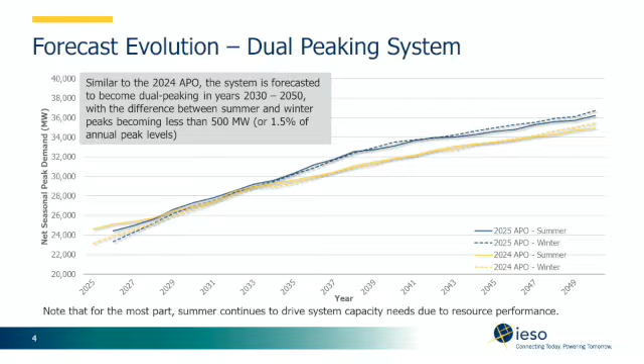In terms of the capacity adequacy outlook, this is assuming all resources are around till the end of their contract with us. If they're rate regulated, they tend to continue indefinitely, these hydro assets with OPG. It does assume some stuff that hasn't been built that was procured in the LT1 procurement, as well as we had early insider knowledge on the Pickering refurbishment and Darlington SMRs, right? So those are baked into our base case.

So this is where capacity expansion comes in, and I want to be clear, the results of this should not be construed as an integrated resource plan for Ontario. We are very aware of the limitations of this modeling process, especially using one deterministic scenario. If this forecast comes to be, if all those costs are actually right, if we can actually buy the stuff and build it, this is what it looks like.

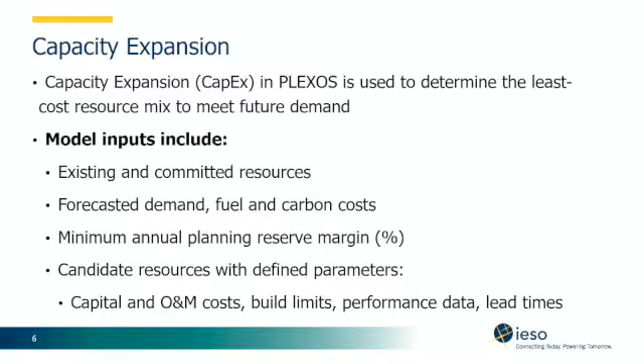Fuel, like the natural gas cost, and we assume the carbon cost goes up and stays in place for the forecast. We didn't include CER in this. We did do a with and without CER analysis last year, but our forecasts tend to only include certain policies and not try to anticipate policies, because that's a bit of a fool's errand we've found. So this one doesn't include CER. Honestly, the results between the two are fairly close in the long run. The only difference is a slight increase in emissions in the near term.

We use a minimum annual planning reserve margin to guide it towards adequacy. And then a bunch of candidate resources, capital and O&M costs, build limits, lead times, performance data, largely sourced from NREL, as I think most in the industry use. And then we have a bit of our own inside information on some nuclear costs and lead times, right? So we're not allowing new incremental nuclear beyond the SMRs and the Pickering refurbishment until the early 2040s, through discussions with Bruce, OPG and our contract management team. It looks like it's probably going to take 16 to 18 years if everything goes right.

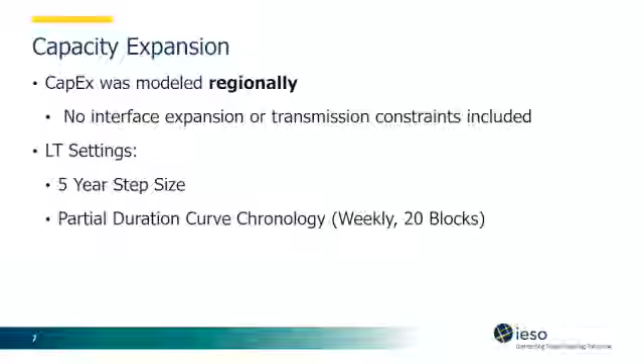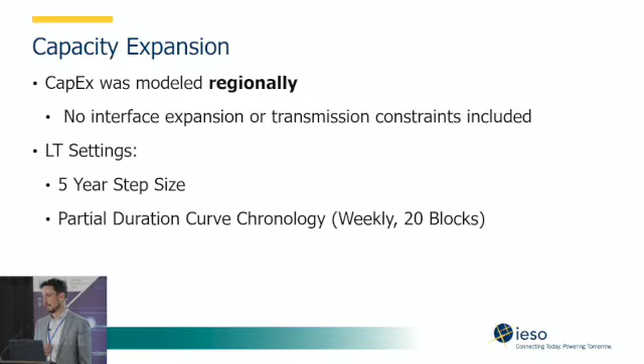We've done some analysis since then. Fitted duration seems to work slightly better, but runs a little slower. Surprisingly, using the sampled chronology, probably just due to the limited scope of our server, it's not sampling enough to improve the results, so we're sticking with duration curves.

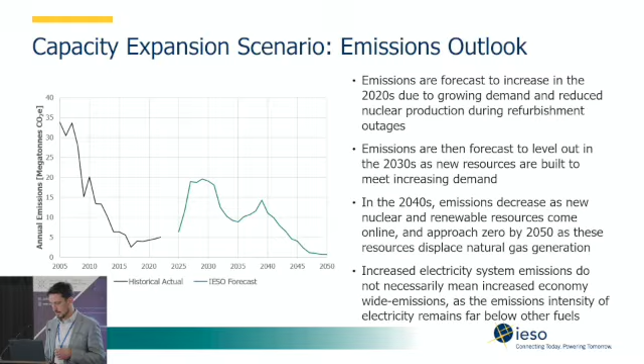So what are we looking to do? This is the funny thing about this whole process for us: we finished this analysis like November of last year, right? And are just wrapping up our 2026 analysis. So when I developed these slides, it was, what are we going to do for 2026? Well, now I can tell you what we've done. I just can't show you the results.

So we have co-optimized the build-out of generation and transmission now. So we can say, this interface needs to be expanded by this much, and this is roughly where these resources should go. Still need to vet it with our transmission planning counterparts to see if it's in any way reasonable, but hopefully we will pass that test and be able to publish kind of zonally where we think resources should be situated.

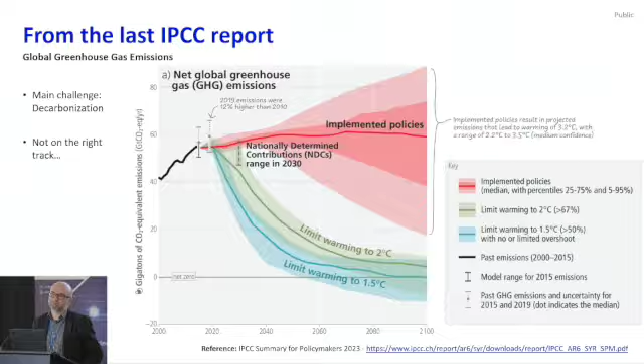So in terms of Hydro-Québec, we connect this decarbonization challenge mainly with electrification. That's why recently Hydro-Québec released a kind of action plan for 2035 and then 2050. It's based mainly on 5 different priorities. I will mainly focus on priority number 2, but maybe I can emphasize a little bit priority number 3, which is increasing the capacity, the production of electricity.

There is an objective of doubling the electricity production by 2050. And I think it will be like 60 terawatt hours more by 2035, which is quite big. So there will be a lot of investment in the coming years to increase the capacity in Quebec.

But what I will focus on today is really priority number 2. So how to better consume the electricity by the different customers and the end users. So we set up 2 targets. First one, the 21 terawatt hours in terms of energy efficiency to implement in the different sectors of our economy: industrial, commercial, and residential sector. And also a second target, which is more about managing the peak demand, so trying to decrease by different means by 3.5 gigawatts the power peak demand during, well, it's a winter peaking region, so during the winter, of course.

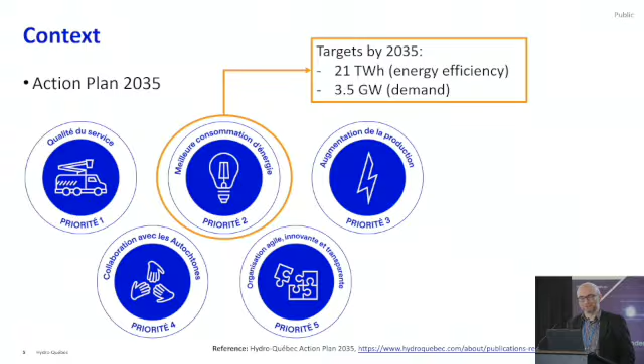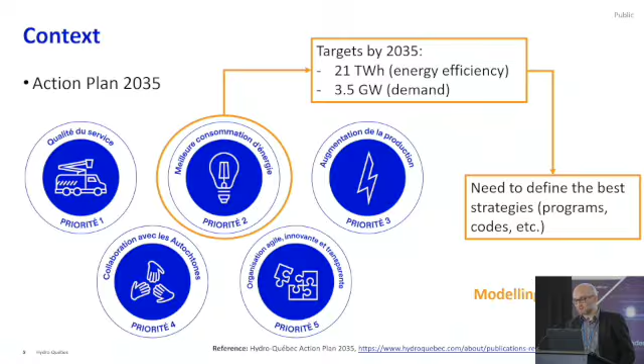So doing so, it requires to define strategies, so that we can set up the best programs, the best standards, the best building codes, national energy code for buildings also, etc. So to do that, we set up big modeling tools, and that's what I'm going to speak about today. So the topic is building stock modeling. What is it? If we make it very simple, it's like a digital twin of our residential building stock. So we try to have a virtual representation of our buildings. And it is based on different components.

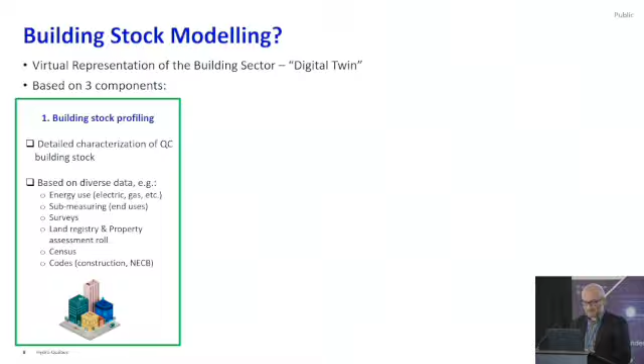The first one, we need to characterize our building stock, so to have a clear idea of what is in our building stock, and it's based on the large diversity of data coming from the energy use, from sub-metering measurements, from surveys, from land registry, property assessment roll, a lot of different data that we need to gather together so that we have a better idea of what our building stock is. If we don't have it, we use the codes, so the construction code, building code, or the NECB, the National Energy Code of Canada for Buildings.

So based on that, a second dimension is, well, we try to model it. There are two types of big approach, I would say. Top-down approach, where we try to have a global view of the building sector and we model that sector in that way. That's not the approach that we use. We try to deep dive in the residential sector and aggregate everything at a higher level. So for that, we have two main approaches I will discuss today: an archetype approach and then a more generative approach. And then you have a list of tools that are commonly used in the building industry. EnergyPlus, OpenStudio, those are clearly the tools that we use commonly.

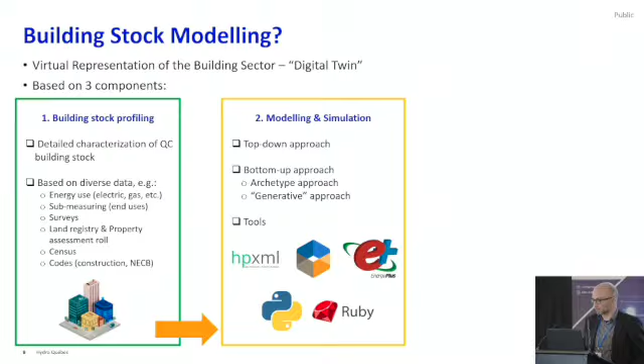And of course, we do all that for end applications. So the idea is really identifying, assessing different energy flexibility and energy efficiency measures so that we can identify the best strategies to fulfill or to reach our goals in terms of energy efficiency and reducing the peak during winter periods.

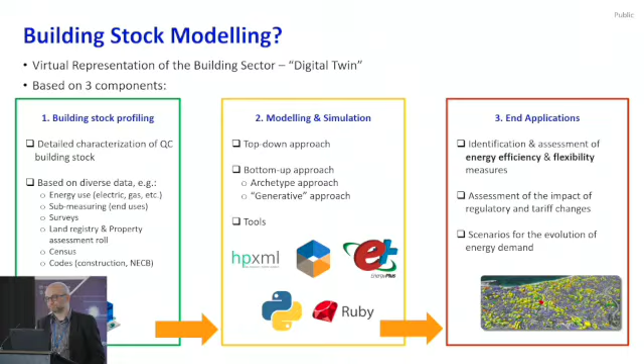So the first initiative, Archetype Quebec, is a collaboration with multiple partners, with the Quebec Ministry of the Environment and also two universities that actually do the deep work on that, Concordia University and Polytechnique Montreal. So the idea of that initiative is really to develop calibrated and validated models for all sectors actually, but we mainly focus for now on the residential sector. The main inspiration is the US prototype buildings. So we try to have our own models so that we can use them, and it's more precise to have our own models. And the future research that can be done is mainly built on that, trying to have a better representation of our building stock using these archetypes.

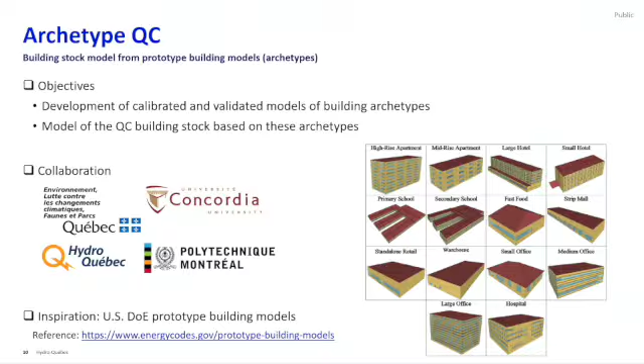For now, where we are, we have more or less 48 residential models representing single-family houses, so detached, semi-detached, row house, that kind of residential building. We have also multi-unit residential buildings, MURBs, and also plexes, so duplex and triplex, which are very common in Montreal, for example. On the commercial side, we have less work done. So we have mainly 14 models that represent schools and offices for now. There is still work in progress so that we can validate these models, but they are already public. So if you are interested, you can use them. It's on a GitHub repo. So the idea, of course, for future work is to expand this so that we can represent the most typical buildings in Quebec.

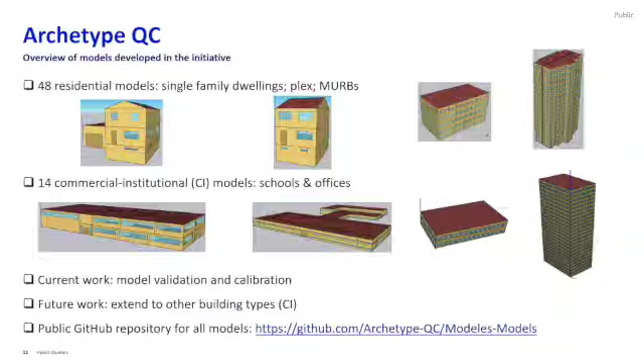So the main problem with archetypes is the lack of diversity. We have one building model that represents the average building type, but we don't have all the variability inside that building type. So that's the target of the second initiative, SimParc, where the idea is really to generate on the fly building models based on attributes. So we provide some attributes. We have an algorithm that uses these attributes to build building models. So that's quite interesting because we can, based on different attributes, generate a lot of different buildings that can represent all the diversity of buildings that we see in our building stock.

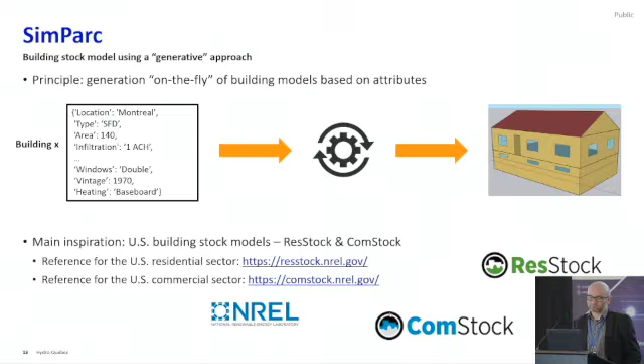So once again, the main inspiration is from the US with the ResStock and ComStock initiatives. So we use the same tools, but we try to Quebec-ize a little bit the input so that we can generate models that are of interest for us. If we go a little bit more in detail with this project, we have mainly a big part of the work, the monk work, that is to deep dive inside the data, trying to gather every information that we can, so that we have a clear idea of the building stock.

And based on all these data, we built a sampler. So it's an algorithm that allows us to generate a list of buildings that is representative of the building stock in Quebec. The sampler works based on a Bayesian network, so it's basically a statistical network, so that we can generate a representative sample of buildings. We can generate like 100 buildings or 1 million if we want.

This Bayesian network can be constrained, so we can decide that the network should produce a list of buildings, for example, just for the island of Montreal, or we can ask for buildings in Quebec with EV vehicles, for example, for all of them. So we can generate really a park of buildings that can be very diverse or very specific if you prefer to be specific.

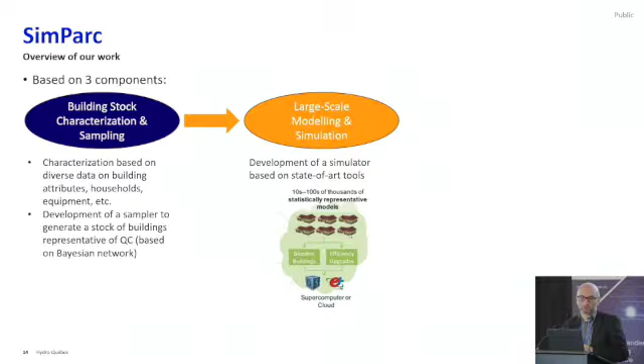So once we have that, we have a list of buildings with all the attributes. We feed that in a second step, which is the large-scale modeling and simulation part, which is basically a parallel simulator. So each building is simulated in an independent way, and we can simulate plenty of them using OpenStudio and EnergyPlus, and using the specific tool OpenStudio HPXML. So using the attributes, we can build a data structure that is compatible with the tools that we use, so that we can generate the models and run it.

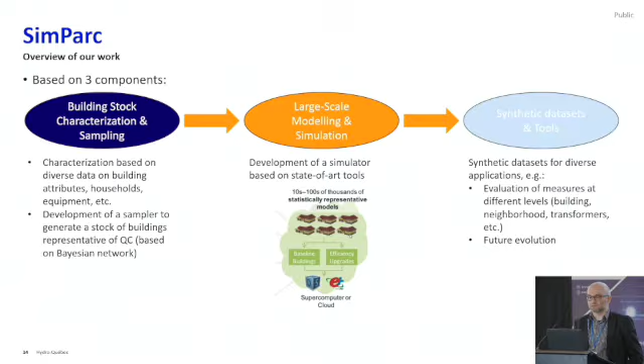When doing that, we get a very big synthetic data set, and that could be used as a reference data set that can be used by multiple actors to evaluate measures, evaluate different scenarios for the future evolution of the building stock. That work is also public. So once again, you can go to the GitHub repo and get the models, the sampler, and the simulator. We don't share for now the data sets that are generated, because we haven't yet validated the results. So we prefer to have something very solid before going public with that kind of data set.

I will conclude with some brief takeaways. So the idea here was to present to you the different initiatives that we have in terms of representing the building stock, with two typical ones, the Archetype Quebec initiative and SimParc, which is more an internal project of Hydro-Quebec. I listed here all the resources that are public that you can use. I know that some modelers in Quebec were very interested in the weather data that was provided by CIMEP. It was deprecated recently, but it's still available on a new GitHub repo, so you can get the weather data there if you are interested.

And then all the models that I presented to you today are available also publicly. I just remind you that Hydro-Quebec also has an open data portal. It's expanding slowly, but over time it gets bigger. So do not hesitate to use them also, because it's quite interesting too. For the SimParc simulator, we do tutorials. So if you are interested, we can set up a kind of tutorial with some of you, so that you can learn how to use it.

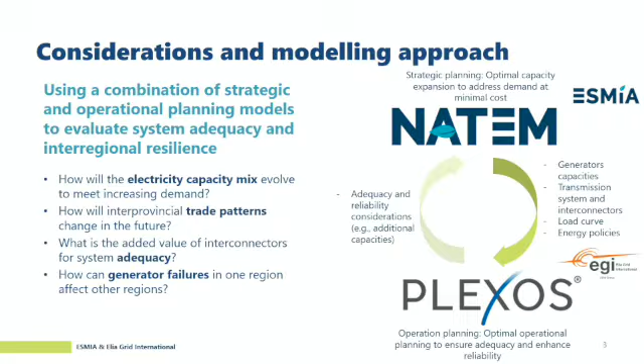So to do so, we used 2 models. NATEM was used as a strategic planning, so we use it for the optimal capacity expansion under the increasing demand at minimum cost. That we feed into the PLEXOS model used for the operational planning, so the optimal planning to ensure adequacy and to enhance reliability. And you can see the preview of some data flows between different models. So, for example, from NATEM, we provided capacities for generators, transmission systems and interconnectors, load curve, and different policies in place in Canada.

For the case study and scenarios, as I said, unfortunately, we didn't have time to look into all Canada, so we selected 2 provinces, our favorite provinces, Ontario and Quebec. Very much enjoyed working on these 2. So the case study was these 2 interconnected and also exchanging some flows with the neighbor regions. For the capacity expansion planning, we were looking on a scenario that we actually took from the multimodel comparison, the one on the nuclear expansion. So I think it fits actually very well what Dave presented. For the capacity planning perspective, we will check the slide on expansion later.

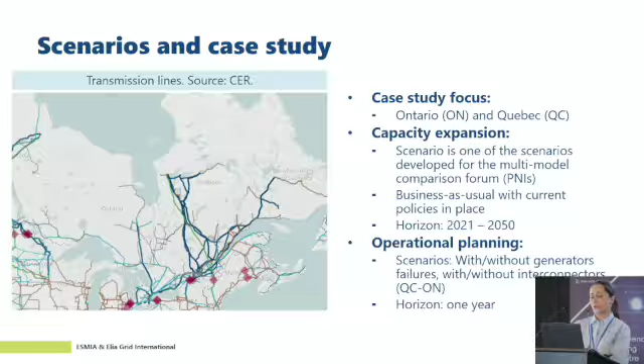And we put ourselves also in a business as usual case, so no carbon reduction constraint, but we still have different policies in place, such as clean fuel regulation and clean electricity regulation. So we're actually considering what's currently in place as a policy. So this is a small difference with what Dave just presented, I guess. Our planning horizon is from 2021 to 2050. And for the operation planning with PLEXOS, we selected 1 year just to test operational planning and what can be the results with and without generator failures, and also with and without interconnectors between Quebec and Ontario.

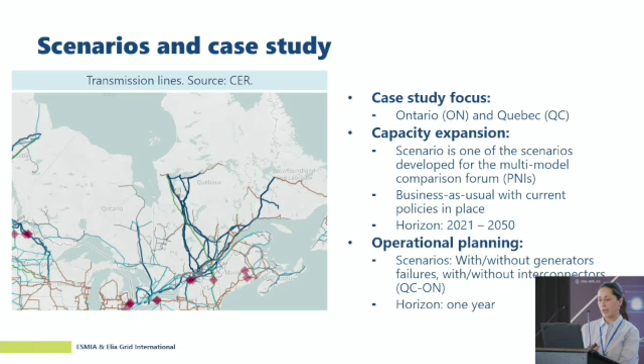So we started gradually, first looking on what will be the capacity expansion mix. So here you can see the preview for Ontario and Quebec. What you can see here is mostly the increase of the electricity capacity mix because of the increasing demand. And since we were also looking on this mix from the point of view of which year to select, just to give you directly the preview, we took 2035 because we wanted to have most of the changes in the electricity mix captured, but at the same time not to be too far in the planning horizon like in 2050, where it becomes too hypothetical and a lot of things can change. So we wanted it to be more grounded to the current state.

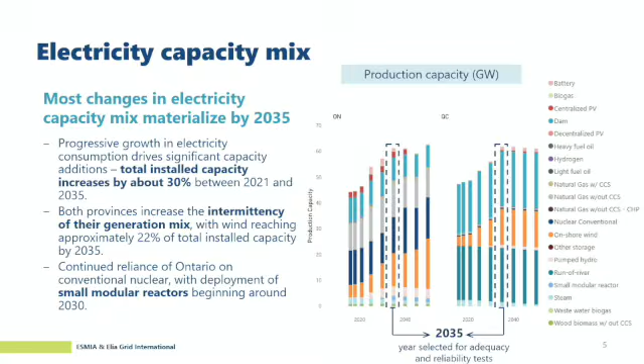So you can see on the slide some observations of how the mix evolves. We see that the total installed capacity will increase by about 30% between 2021 and 2035. We have increasing intermittency inside our generation mix, which is mostly due to onshore wind, so it's about 22% of the total mix for both provinces in 2035. And for the nuclear, since we curated the scenario with expansion on nuclear, we continue to rely on nuclear for Ontario. And SMRs are coming in a bit earlier than they presented. I think it was starting from 2040. But that was incremental. Okay, right. Exactly, okay, perfect. So in 2035, you can see already the small modular reactors deployed in Ontario.

Starting from looking at the trade patterns and how they may shift in 2035 compared to the current situation. We noticed that in general, Quebec tends to stay a net exporter of electricity to Ontario. And what we were also interested in is how it may shift the trade patterns during the year.

And since Ontario after 2030 tends to become a more winter-peaking province, but still keeping the summer peak as well, what was interesting is that it continued to import more electricity during the summer. This is due to various reasons, such as Quebec having more available electricity during the summer, and also Ontario tending to integrate more energy efficiency measures, for example refurbishing buildings, and also leveraging higher winter wind generation and expanding district heating systems that can utilize waste heat from the nuclear facilities.

So this section ends here. I will pass to my co-presenter, who will talk more about reliability and adequacy, and I will try to conclude that.

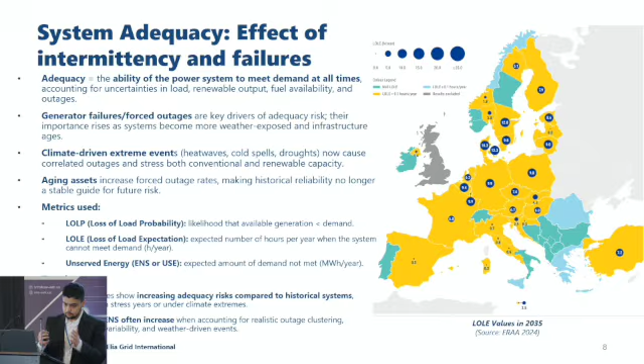Okay. So, system adequacy. Just to give you an idea about what it is, I'm pretty sure most of you already know it. It's just the ability of a power system to meet demand at all times. And here we account for all sorts of uncertainties that could happen with load, with renewables, with fuel availability, and also the generator availability. And especially in the context of Europe, the generator availability and the weather are the most important factors in doing this sort of analysis.

So in Europe, we do these ERAA studies, European Resource Adequacy studies. There, both the generator failures and weather are what we consider primarily. But there are other forms of failure like fuel availability and other factors that could also be considered. But our focus is mainly on generators and the weather.

So how do we measure reliability? There are some metrics. Loss of load probability, the likelihood that generation is not available to meet the demand; loss of load expectation, how many hours we expect that the load is not met; and also the expected amount of energy that is not met. Generally, the trend we see is that as the system evolves and more renewables come in, we see increasing adequacy risks compared to what we have seen historically, and the indicators also show this in general.

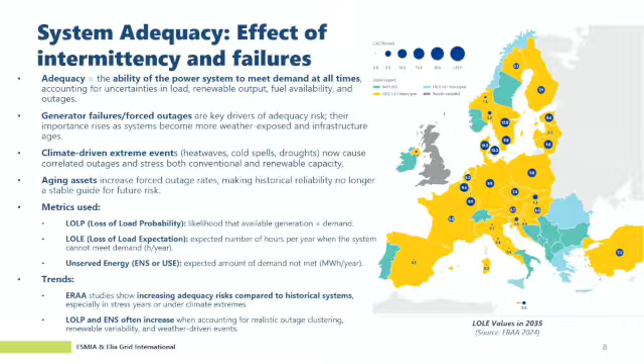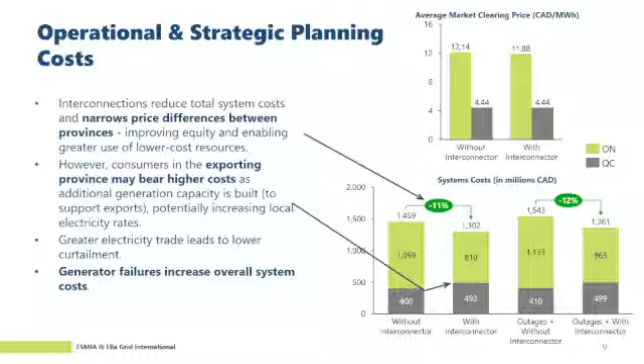So before we get into the reliability indicators, we will just look at how the interconnectors benefit the system in general. What we see here is the interconnectors will help in making your system cheaper, basically. But this is more from how you model it, right? When you consider two regions separately and model them separately, they have their own costs. But when you put them together and introduce the interconnection, you make the system cheaper, but then the exporting region can bear more costs. And we also see that if you introduce generator failures, the cost increases.

But again, this also depends on the number of samples you run. We didn't have too much time or computation to run too many samples. So in this study, we just used around 50 samples. But of course, more is always better.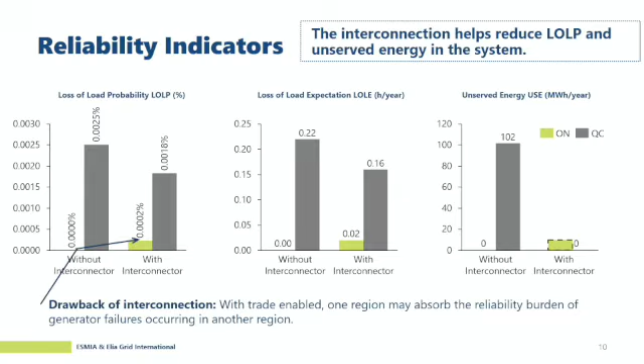Just to confirm, and based on yesterday's presentations, interconnectors add clear value, so we can have systems at lower cost. Regions with less renewable generation can get access to cleaner power from another region. Exporting regions could reduce curtailment by using interconnectors to export this electricity to neighbors, and obviously improve general adequacy and reliability, as Anirudh just showed you.

However, for the sake of balance and to add some important considerations, what we noticed is that consumers in exporting provinces may also bear higher costs, as additional generation is built to support this export, potentially increasing rates. So this is a consideration to take into account if we want to interconnect a lot of provinces and some of them become exporters. They will be investing more in generation, so this investment should then be paid.

And also an interesting effect: reliability risks spill over across the border. So before connecting with your neighbor, it is important to ask how he's doing from the point of view of reliability. If he's not doing well, he will definitely benefit from this connection. But you, having a system with stronger reliability, will be bearing some burden of failures from his side. I tried to listen very carefully yesterday to NERC, so I put some quotes. You can correct me on those.

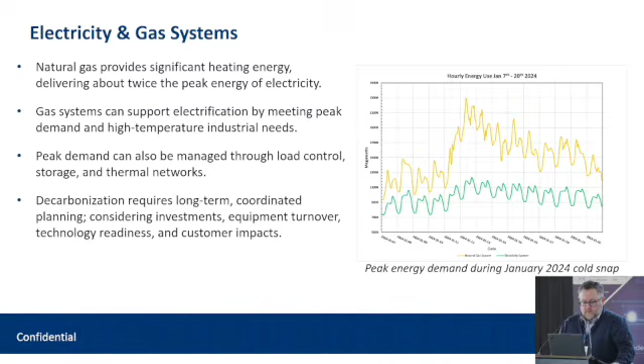So a couple of years ago, we had a new energy plan produced. This was from our previous minister, same government, different minister. And leading into that, we wanted to get the utilities together to start thinking about things together. The BCUC, to their credit, prompted this in some of their decisions back in 2021. FortisBC is kind of our major natural gas distributor. We have BC Hydro, major Crown Corporation, the Province is its sole shareholder. And we have Pacific Northern Gas, PNG, that looks after the northern part, so smaller numbers of customers, but an important role to play in the north and colder climates.

And we got them all in a room and said, okay, let's think about the future. And they hadn't, to that point, done a lot of that type of thing together. Their planning teams are now talking on a regular basis. They're sharing assumptions. The goal is when we get to the integrated resource plans for both, that they're working from the same songbook, they're using the same assumptions. And up until that point, they weren't. They were similar, but not totally the same. And also modeling in their IRP some of the government policies in the same way through our CleanBC plan and what we're doing as well. And I'll talk about that in a minute too.

So folks joked, oh, this is going to be interesting. You're going to get them all in a room talking about each other. Are you wearing a hard hat or not? But it actually turned out to be a really productive process.